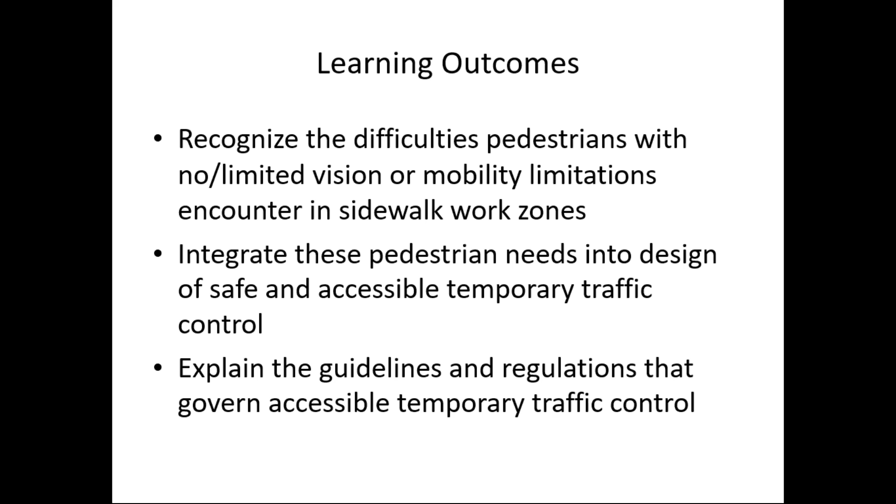I hope you'll be able to explain the guidelines and regulations that govern accessible temporary traffic control, mainly PROWAG, the Public Rights of Way Accessibility Guidelines, and the Manual on Uniform Traffic Control Devices, as well as, to a lesser extent, the Americans with Disabilities Act Accessibility Guidelines, ADAAG.

I hope also you'll be able to assess a temporary traffic control setup for safety, accessibility, and detectability. By that, I mean if you were to go out on the street and see one, maybe set up by your crews or just one that somebody else set up, you'll be able to assess that to see whether it's safe, accessible, and detectable. Or also, if you're reviewing a set of plans for a larger project, that you'll be able to assess those plans, the design of the temporary traffic control, for safety, accessibility, and detectability.

And then I also hope you'll be able to select and deploy detectable and compliant devices and temporary ramps for an accessible pathway or sidewalk closure that maybe you are setting up or your agency is setting up, and if necessary, reconfigure the pathway surfaces. So that's what I hope you'll get out of the session over the next couple of days.

We'll start with the act that really generated the need for this topic, and that is the Americans with Disabilities Act, ADA.

President H.W. Bush signed it into law in July of 1990, so it's over 30 years old now. It's an equal opportunity law for individuals with disabilities to allow them to access the same programs and services as able-bodied individuals.

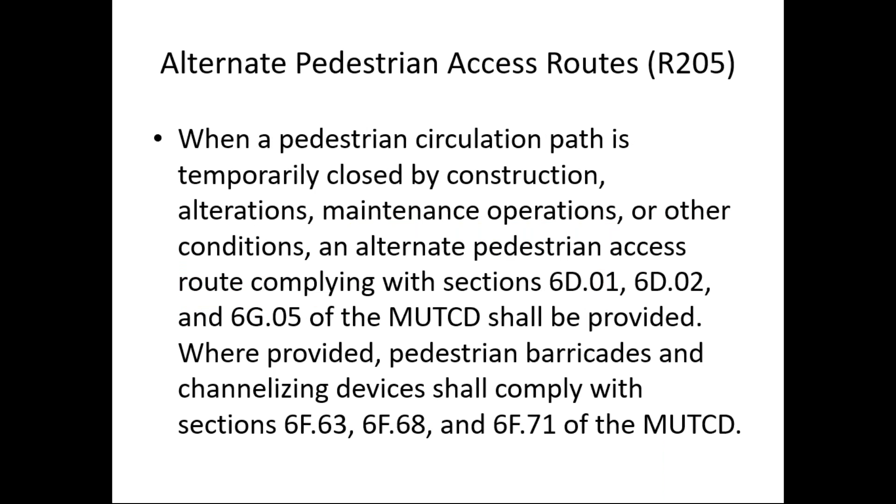PROWAG also mentions what they call the alternate pedestrian access route. There's a lot of text on this slide, I'm not going to read all of it. But the thing I'd like you to take away is notice PROWAG refers to maybe half a dozen or more sections of the Manual on Uniform Traffic Control Devices in terms of barricades, channelizing devices, and characteristics of the alternate pedestrian access route. So as I mentioned earlier, in this particular topic, both PROWAG and the MUTCD go hand in hand, and we need to be familiar with the provisions of both.

Many of you are probably already familiar with Part 6 of the MUTCD. Right up front in section 6A.01, it talks about the needs and control of all road users, which includes pedestrians, and notice they specifically call out including pedestrians with disabilities, through a temporary traffic control zone, shall be an essential part of highway construction, utility work, and maintenance operations. So it's not just a nice thing to do. The MUTCD has it as a shall condition, so it's a standard or required condition.

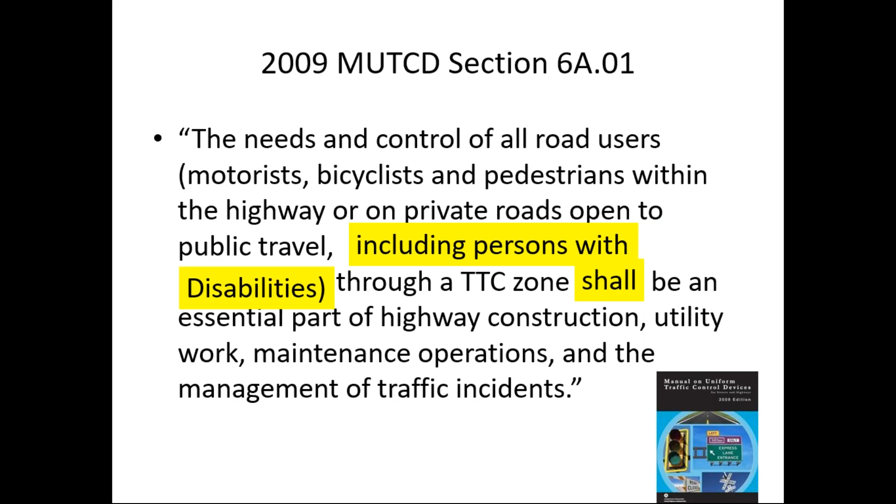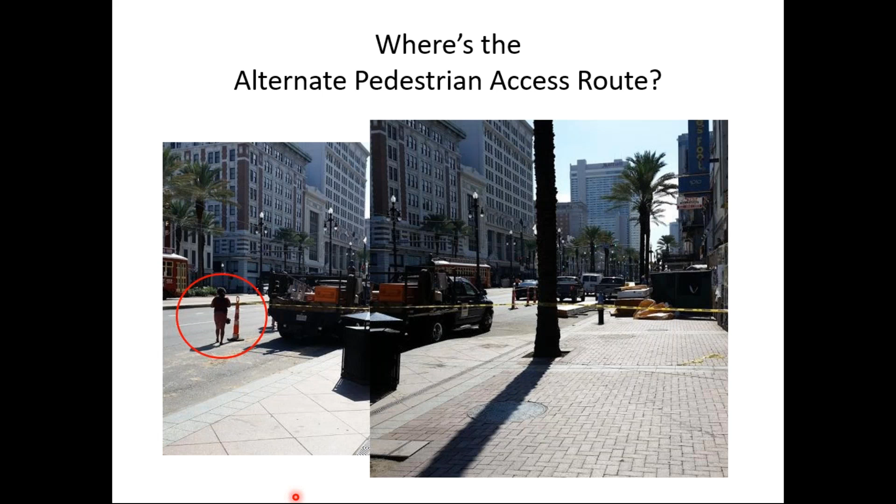So what we'll talk about over the next couple days are the requirements that apply to all temporary traffic control zones by state and local road agencies, by construction and maintenance contractors, both road construction and vertical construction, utility companies, landscape companies, anybody doing this sort of work, as well as any sidewalk, lane, or road closures for vertical construction activities.

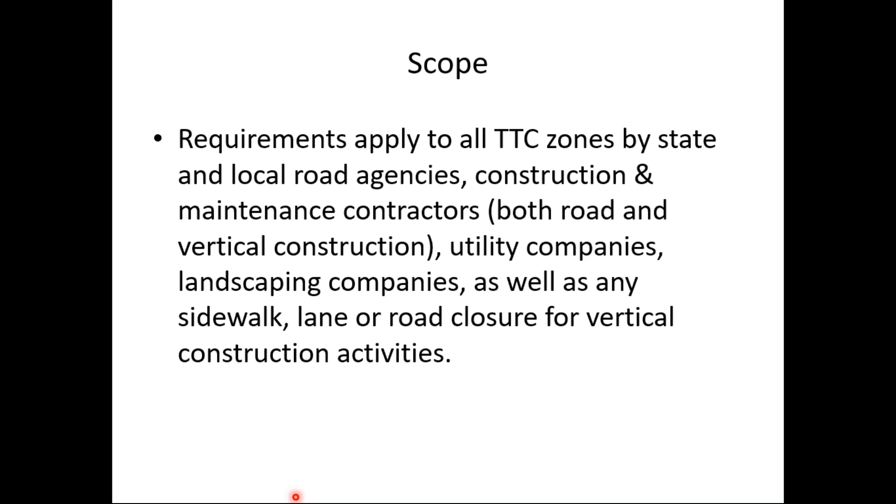That includes things we've already talked about: closing a sidewalk for repairs or utility work, closing a sidewalk for building maintenance, maybe small projects like a downtown storefront alteration or reconfiguration adjacent to the public right-of-way, where maybe all or part of the sidewalk will have to be closed for that project. And then major projects, which it appeared this project I just showed you on Canal Street in New Orleans was, where you're going to have long-term closure of sidewalks or road or street lanes.

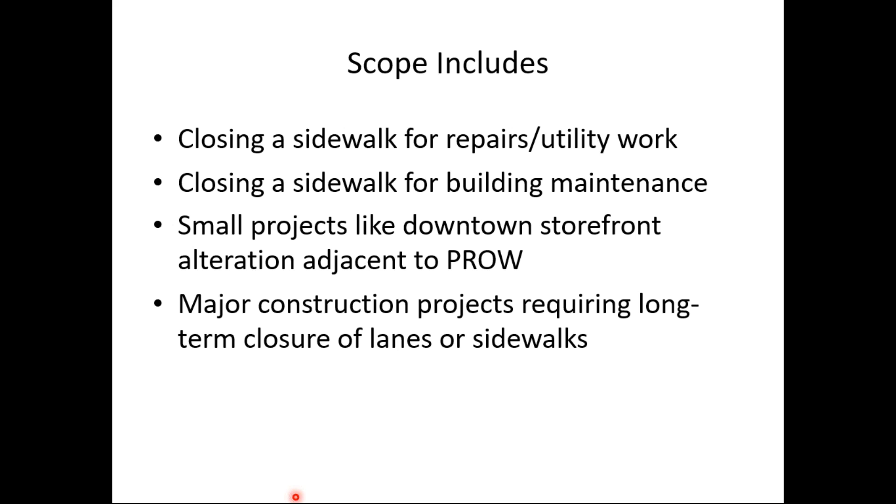Before we go on, I probably should define a couple terms. I've used the term accessible and detectable a good bit already. Accessible describes an alternate pedestrian pathway through a sidewalk work zone that pedestrians can safely reach, enter, and travel through to the end of the work zone.

That implies curb ramps, a smooth, stable, slip-resistant surface, and sufficient width that they can turn. This is not really a work zone in the image you see down here, but notice this sidewalk is a smooth, stable, slip-resistant surface. It's wide enough that at a curb ramp, for example, this individual would be able to turn his power chair, a motorized chair, into or onto the curb ramp. So this would be an example of an accessible facility.

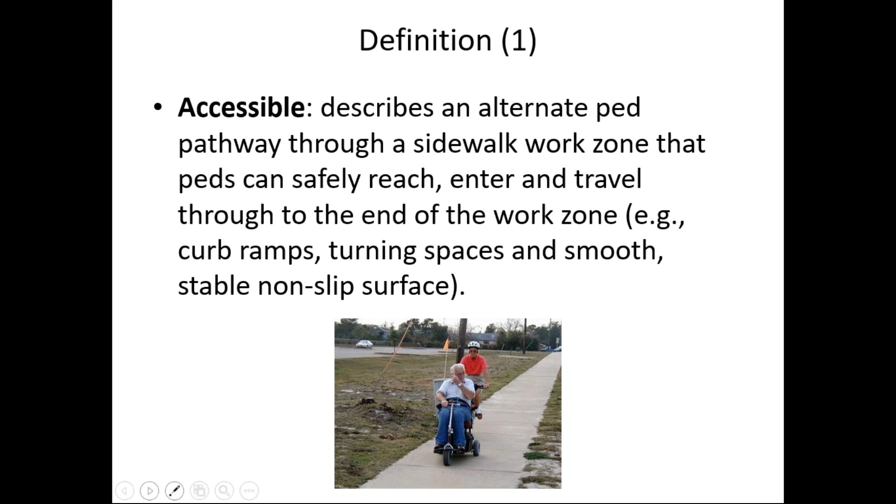I've also used the term detectable. What do I mean by detectable? Detectable means a traffic control device placed within a temporary pedestrian pathway that has a continuous edge, and pedestrians with limited vision can follow that edge either by hand or by a navigation aid, what's called the long cane or the white cane.

This is just a static photo, but the woman in this image who is blind is swinging this cane in an arc in front of her, probably about 2 to 3 feet in width, periodically touching the ground, other times maybe not touching the ground. What she and others who are blind are looking for is what they call a shoreline, some detectable edge that they can follow and maintain a reasonably straight line.

This also is not a work area, but notice this, what would we call this? A little wall here of some sort or high curb. That is detectable with the cane, and she can detect that with her cane. For her, that would be a good shoreline. She can stay pretty parallel to that detectable edge as long as it exists. So that's what we mean by detectability.

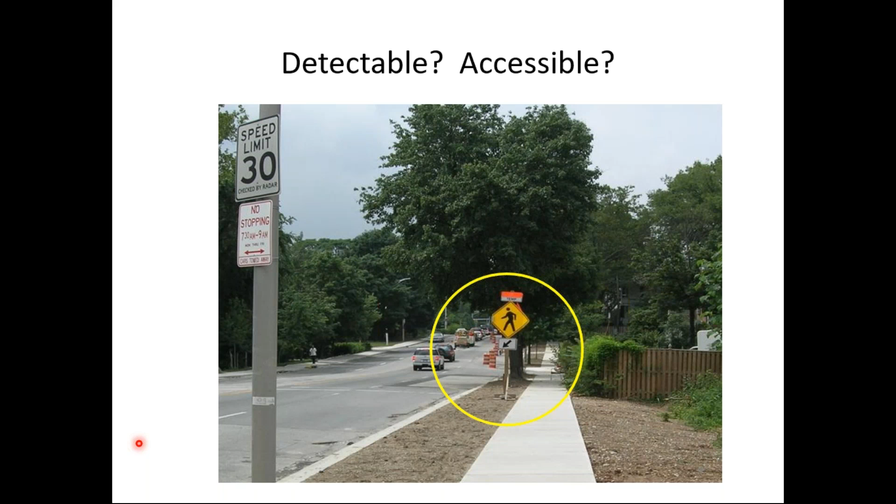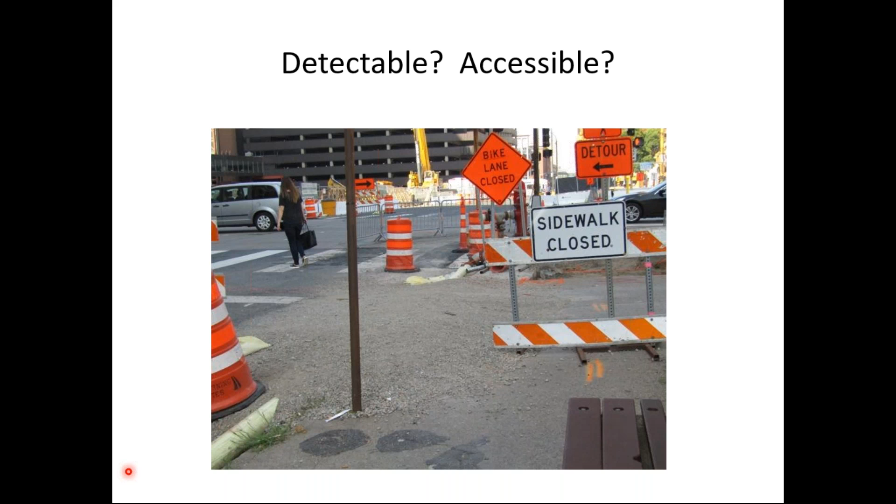Notice there's a pipe here in the gutter, and this driveway is the main access to the job site. The contractor apparently put some pea gravel here so vehicles could go over that pipe. But this loose pea gravel or stone would not be traversable by someone in a wheelchair. So this is not an accessible path for someone in a wheelchair or someone using a walker. Again, this is neither accessible nor detectable.

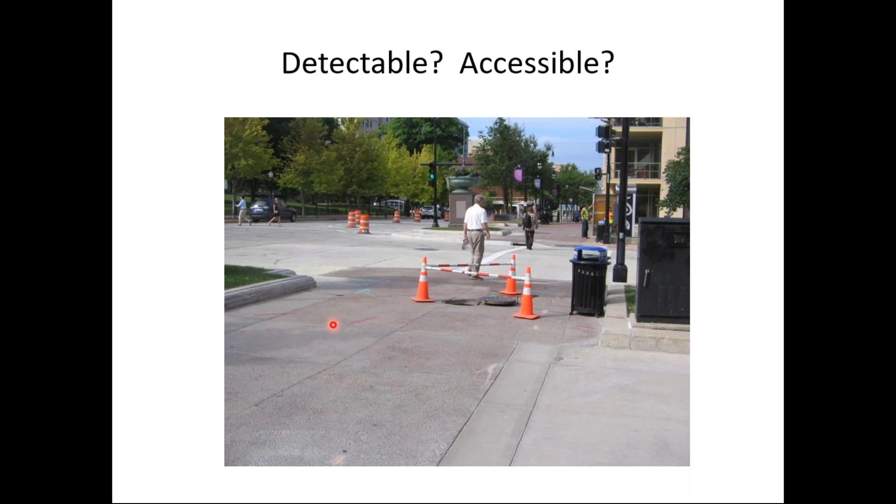For most of the time I was there, they had an individual standing here. A human can be a good form of traffic control on sidewalk work zones, because that person, if they spot a visually impaired individual, could provide assistance in terms of the proper path. And it looks like from the curb here to the cone, I'm just estimating, that's maybe 5 to 6 feet. So certainly there's an accessible path here. It's a wide enough path that someone in a wheelchair or using another walking aid would be able to negotiate the sidewalk. They may have to go around those cones, but they could still utilize the sidewalk.

Why is this important? Well, everybody benefits, even able-bodied pedestrians, from these things we're talking about. But also the United States has a significant disability population. Overall in the population, it's around 10.4%. So about 1 out of every 10 Americans has a disability. Some of us may, from time to time, have temporary disabilities. Maybe you've had a sports injury, knee surgery, or hip replacement, and maybe you were using crutches or a walker or even in a wheelchair temporarily. So it's important for the temporarily disabled that we make things accessible as well.

Many communities want to encourage visitors for economic development reasons. Where I am right now, Morgantown, West Virginia, we like to bill ourselves as kind of a retirement community—come here and live, have a good quality of life. There's a university in the city. You can take advantage of cultural activities, sporting events, and so forth. And if you're going to do that, which is a good thing, keep in mind that when it comes to the over-65 proportion of the population, I think around 33% of senior citizens are disabled, have some sort of disability. So these things are particularly important for the older population.

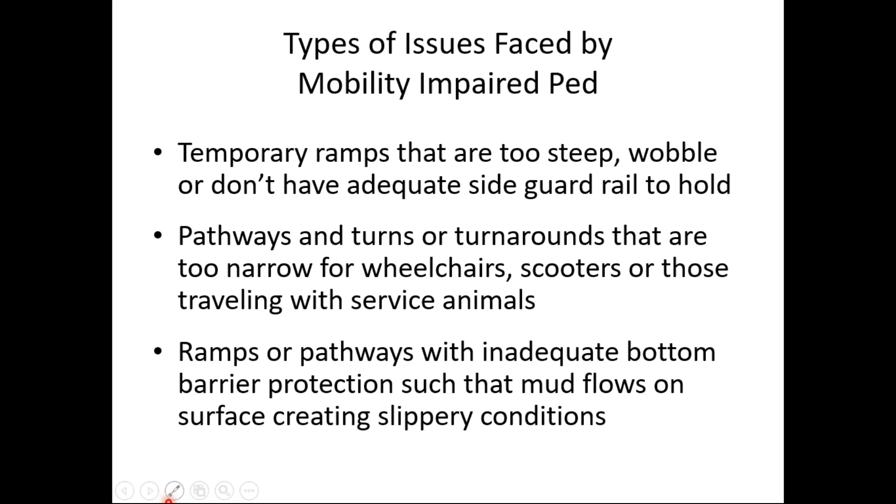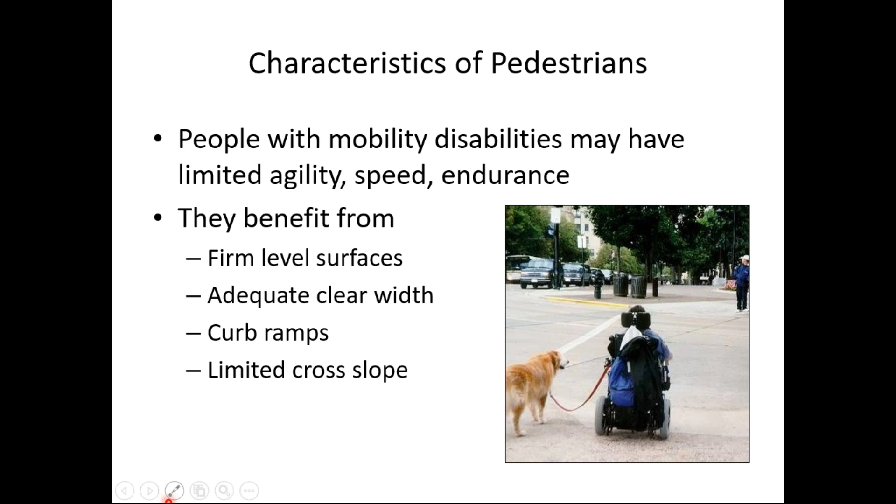Again, this is one of those things that benefits everybody. A mom or dad pushing a stroller on a city street or in a residential area benefits from these same characteristics, as does a delivery person using a wheeled cart to deliver to a store or business.

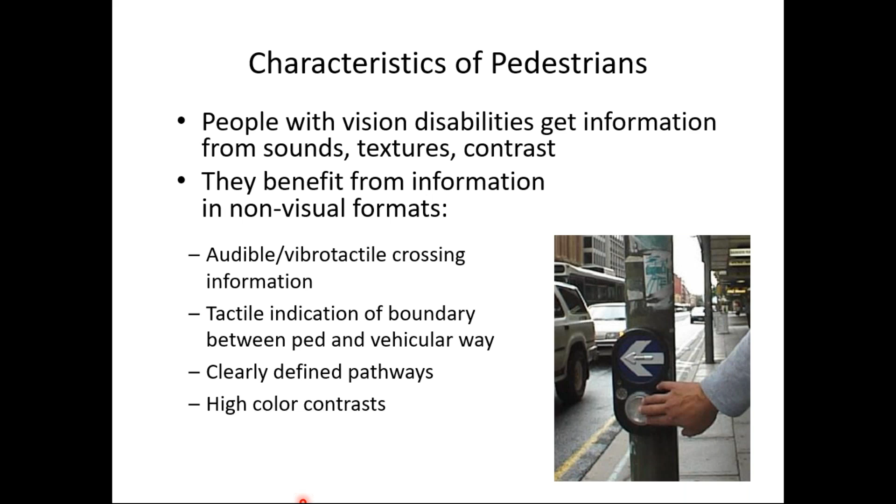The third category of pedestrians we'll talk about with disabilities are those with cognitive disabilities, meaning disabilities that affect information processing and decision making. Examples are individuals who've suffered a traumatic brain injury, maybe some of our veterans in the wars overseas, or even individuals in a serious automobile crash. Autism is another example of a cognitive disability. These are challenging to design for because there's so much variety in the types of cognitive impairments, but there are a few rules we should try to keep in mind to accommodate the cognitively impaired.

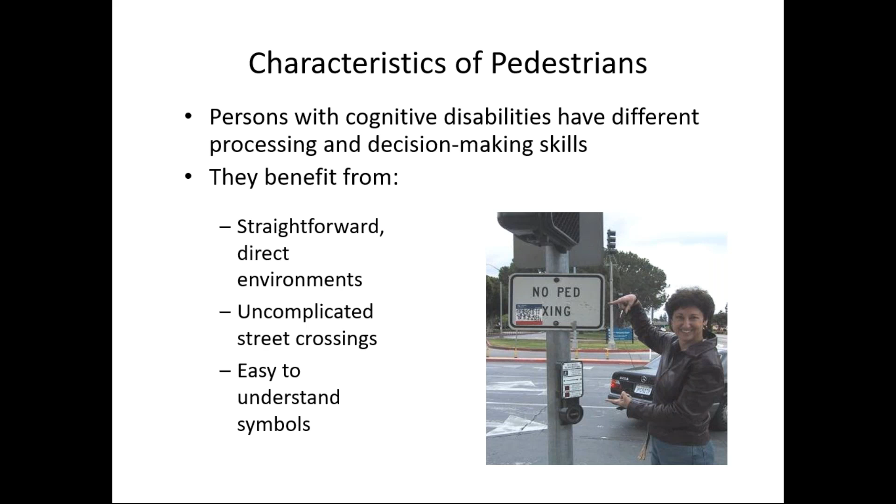Some people ask, what if they put orange and white drums in a line butting up against one another? That would be better than what's here, but I'd say still not as good as having a continuous detectable edge, like lumber or plywood that creates a detectable edge. But good question, thanks Ron.

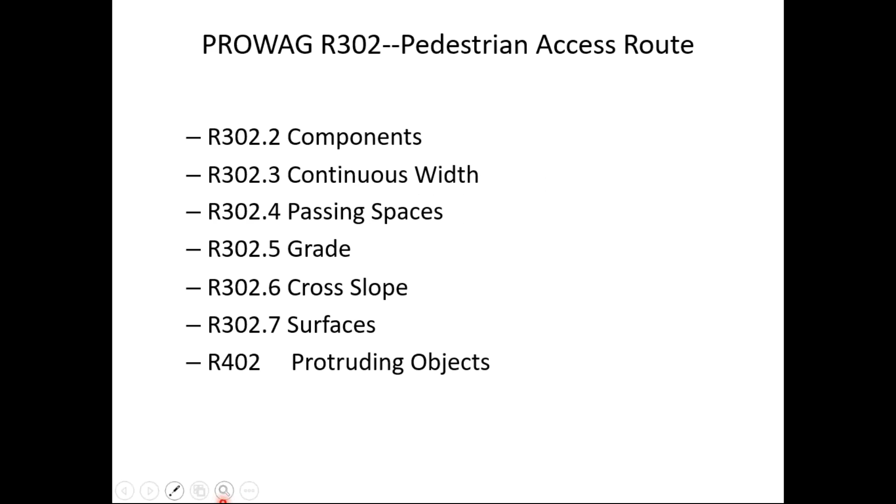Before we get into the details of some of the things you're asking about, let's look at the basics of the pedestrian access route. This comes from PROWAG. Remember, if we're required to have an accessible pedestrian route, or alternate route, we need to know what makes something accessible. So that's what we're going to spend a few minutes on. We're going to look at things like width, grade, cross slope, surfaces, and what are called protruding objects.

Where do these apply? It applies to walkways, so sidewalks, plazas you might have, ramps, which are a general kind of ramp, but also specifically curb ramps, which are a specific type of ramp, and the landings. Something called blended transitions, crosswalks. Crosswalks are part of the PAR, and also pedestrian overpasses and underpasses. Many of you probably have these in your communities. They also have to comply with the PAR requirements.

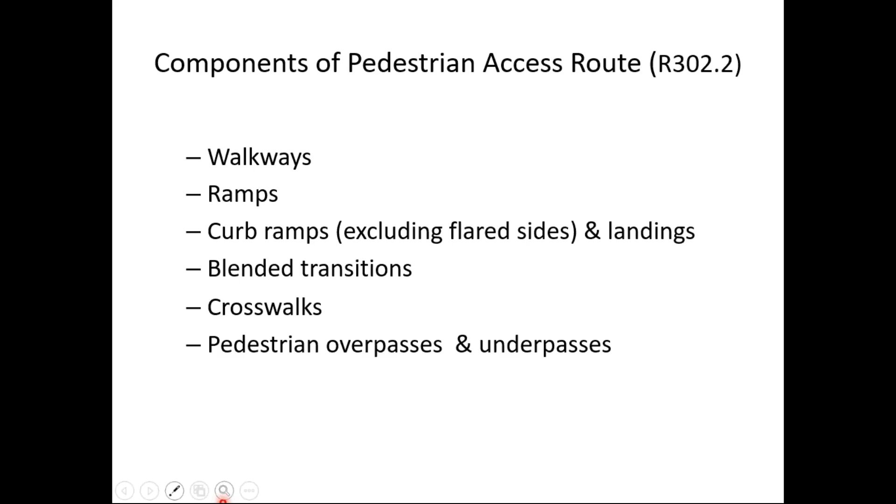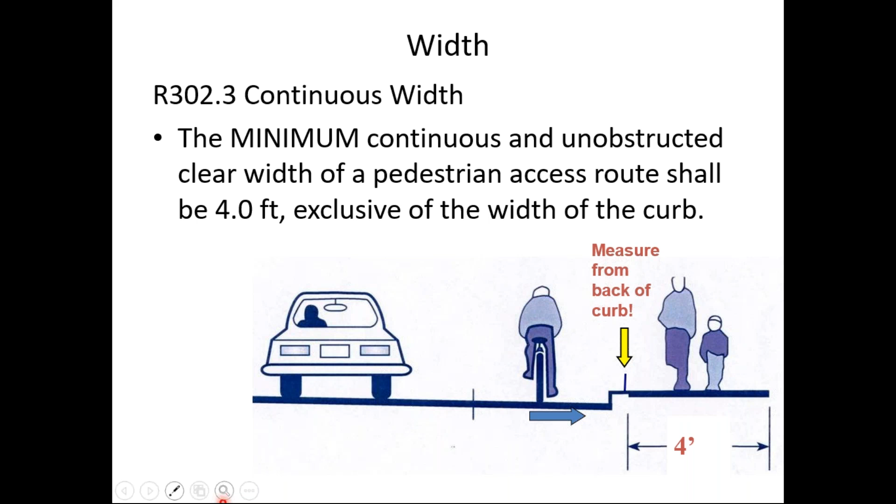Width: PROWAG says the minimum continuous unobstructed clear width of the PAR shall be 4 feet, measured from the back of the curb. That's what PROWAG says. I realize some of your agencies have adopted maybe 5 feet as the minimum width, and that's great, you've gone above and beyond PROWAG. Keep in mind, if your agency has adopted something better than PROWAG, that's your standard. But PROWAG calls for 4 feet, though I know many agencies call for 5 feet.

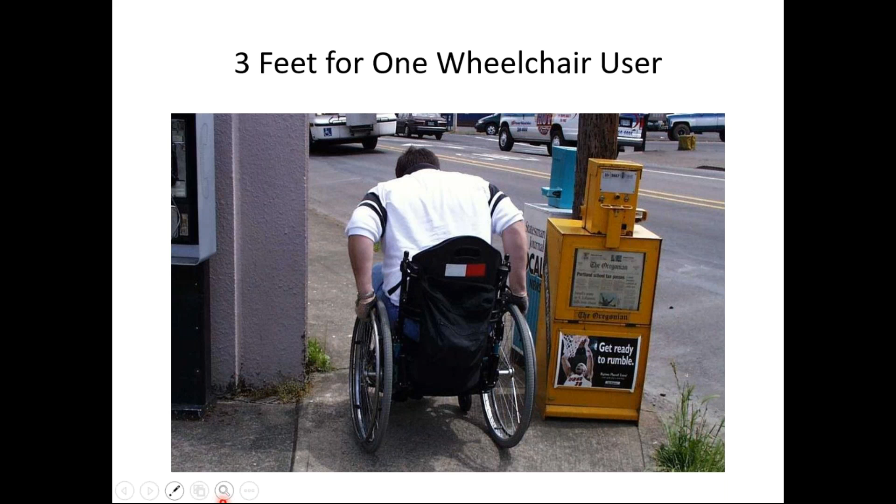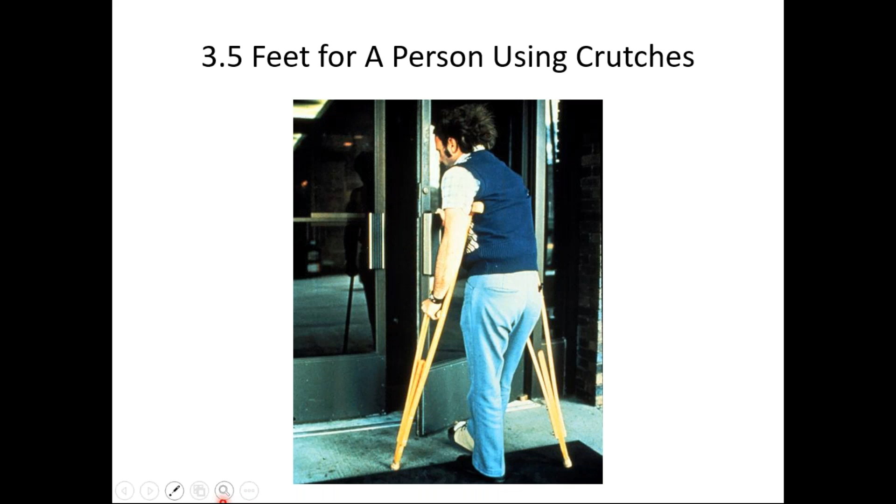Just as some examples, 3 feet for one wheelchair user. Interestingly, I mentioned ADAAG at the start. The design user in ADAAG is an individual in a wheelchair, and so in ADAAG the minimum width of a walkway or travelway is 3 feet, but it's 4 feet in PROWAG, because the design user is someone like this, on crutches or using braces or a walker. If we measured from crutch tip to crutch tip on this fellow's crutches, that would probably be closer to 3.5 or 4 feet. That's why PROWAG has a wider minimum width than ADAAG.

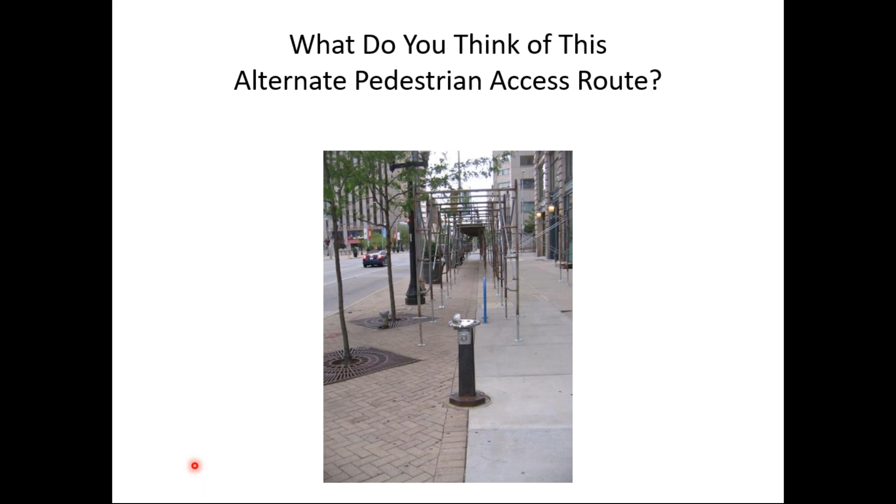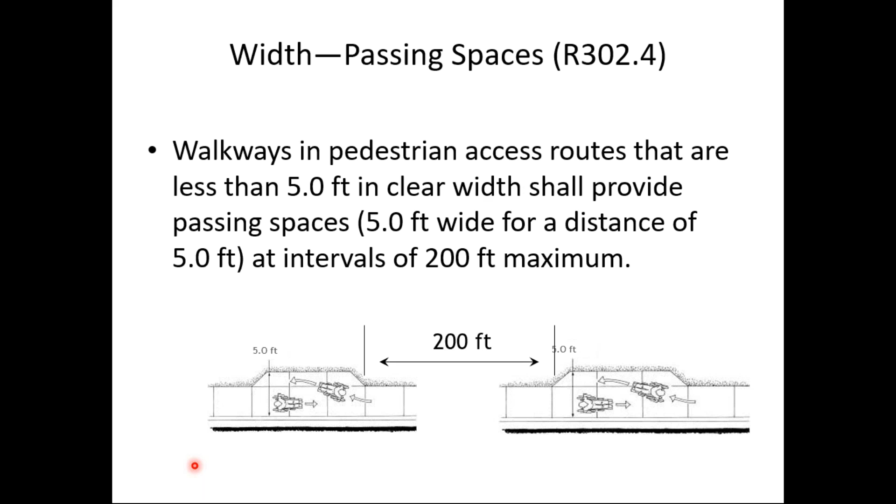If your pedestrian access route is less than 5 feet in clear width, you have to provide passing spaces, 5 foot by 5 foot passing spaces every 200 feet.

We should also be aware of what are called protruding objects. Protruding objects are things that project or protrude more than 4 inches into a pedestrian path at a height above 27 inches and less than 80 inches.

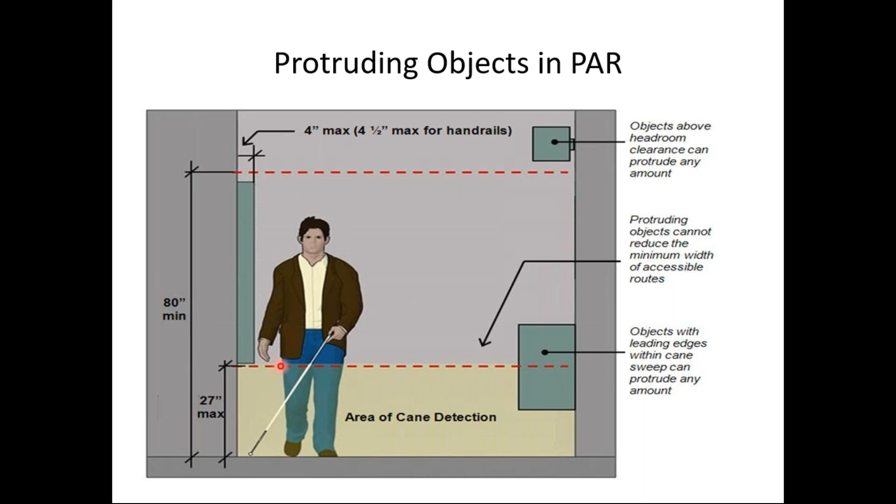Other examples are tree limbs, signs, pole-mounted traffic signal controller boxes, hanging baskets of flowers—anything that protrudes more than 4 inches into the pedestrian path at a height above 27 inches and lower than 80 inches is a protruding object because it cannot be detected with the cane. If it's lower than 27 inches, it's detectable. If it's above 27 inches, it's not detectable.

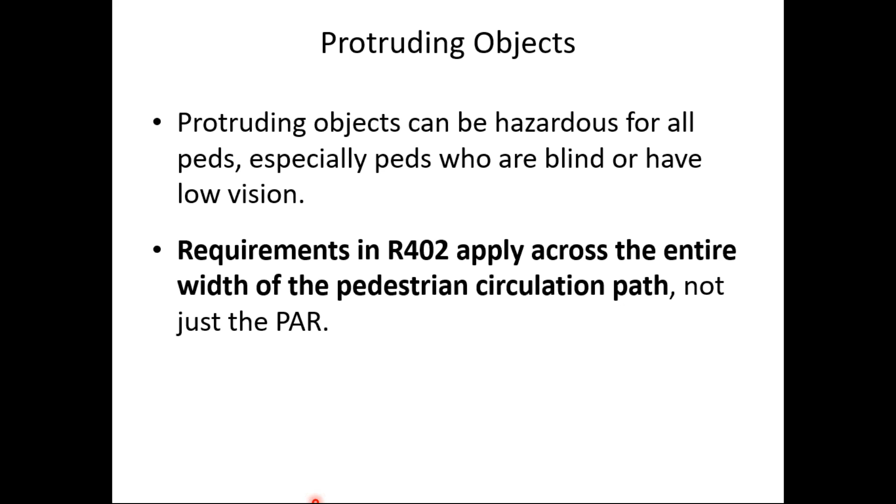These requirements apply across the entire width of the pedestrian circulation path because they're a safety issue. Somebody could poke their eye out on a tree limb or be injured by striking the fire department connection or one of these other protruding objects.

Walkway cross slope, maybe one of the biggest challenges within PROWAG. The cross slope of the walkway, the pedestrian access route, shall be 2% maximum. I underline maximum because there is no allowance for construction tolerance. So if your concrete crews or your contractor says the best I can do is plus or minus 0.5%, then we need to be designing the walkway for 1.5% so that when it's built, it won't be more than 2%.

The reason for this strict requirement is the individuals in the manual wheelchair. It takes a lot more effort to keep a straight line on a steeply cross-sloped surface than on a more level surface.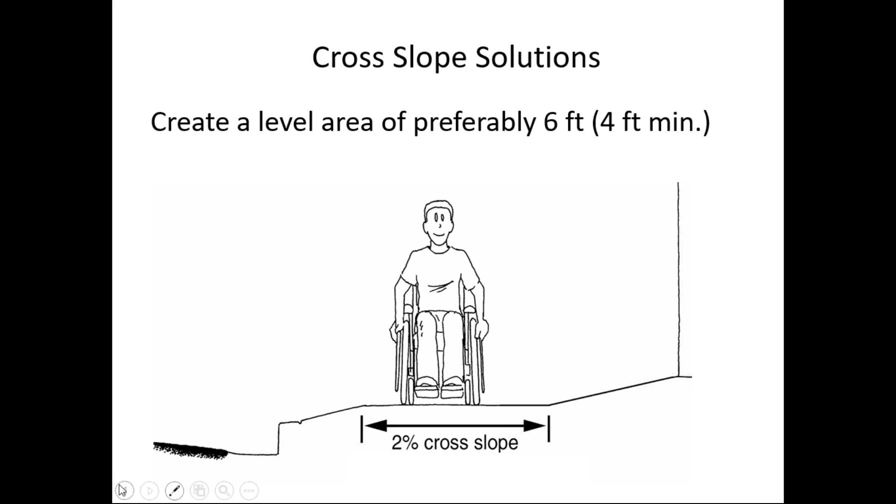Grade: if the sidewalk is in the right of way and along the road, follows the road, then the sidewalk grade can follow the roadway grade, no matter how steep it is. But if the sidewalk does not follow the street, then the maximum sidewalk grade is 5%.

Something else to keep in mind, as we see in the cartoon drawing here: imagine this individual's crossing the street. They went down the curb ramp and now they're going up the street crown to cross the street. The maximum crosswalk grade is 5%, so that means the maximum street crown is 5%. Remember, crosswalks are part of the pedestrian access route, so they have to comply with these requirements.

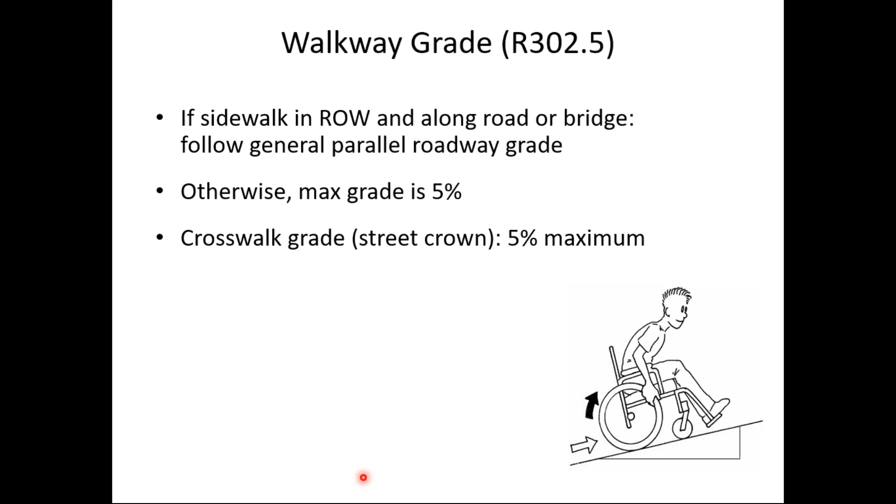In terms of a manual wheelchair, it obviously takes a lot more energy to go uphill, more tiring than downhill, but actually, to me, downhill is probably the more critical situation. It's difficult to control the speed of the wheelchair—that's why this fellow is wearing gloves in the summertime, to avoid blistering or peeling the skin off his hands trying to brake the wheelchair. People using crutches, walkers, or canes also find it harder to go downhill because it may be difficult to maintain stability, balance, and control, and there's a greater danger of falling.

A real cross slope challenge is driveways. The grade of the driveway becomes the cross slope of the sidewalk, and it's like a West Virginia driveway—most of our driveways are far steeper than 2%. So then it becomes a non-compliant sidewalk cross slope.

Another issue is the grade breaks here, where the sidewalk meets the driveway. I realize this is a cartoon depiction, but it's technically accurate. If you look closely, notice the small front wheel of that wheelchair is off the ground. Any time that happens, that's not good, because the stability of that wheelchair is jeopardized—that chair could tip over or flip over. So we want our designs to be such that all 4 wheels of a manual wheelchair are always on the ground at all times.

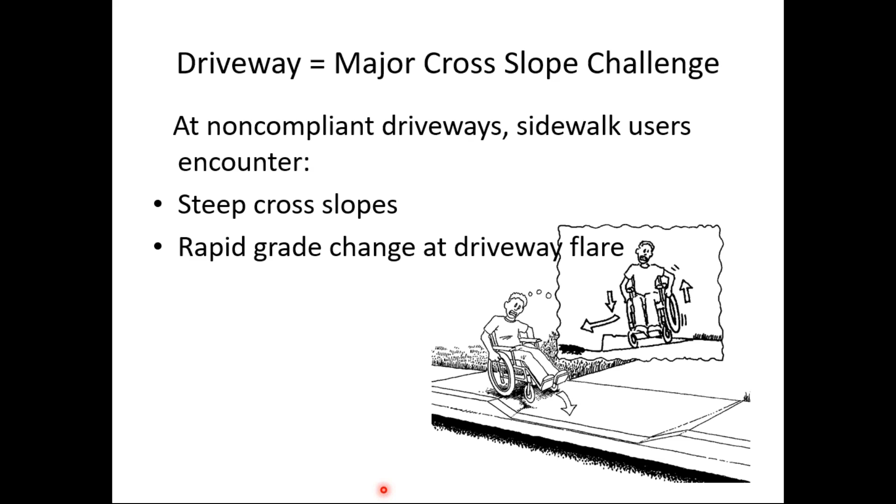Surfaces, per PROWAG, must be firm, stable, and slip resistant, and should be smooth. The best surfaces would be concrete or asphalt, or timber like a boardwalk. That's firm and stable, but may not be slip resistant when wet, so we may need to increase the friction. Same thing with steel plates. Sometimes agencies put a steel plate over a trench in the sidewalk, which is fine as long as there's a way to get onto and off that plate, but there should also be some slip resistance on it, because metal can get slippery when wet.

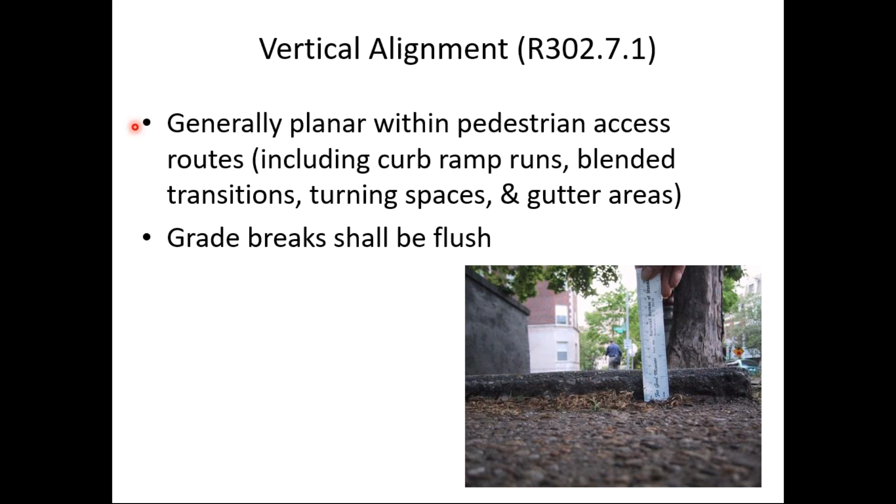We do need to pay attention to vertical alignment. This is not a good situation. It shows kind of a double jeopardy here. An agency could face an ADA civil rights lawsuit because this would not be traversable by a wheelchair. But also, if an able-bodied pedestrian tripped and fell here, the agency might be subject to a personal injury lawsuit as well. Notice how this stops the manual wheelchair, and depending on the speed of the chair, that abrupt stop could actually pitch the person out of the chair onto the sidewalk.

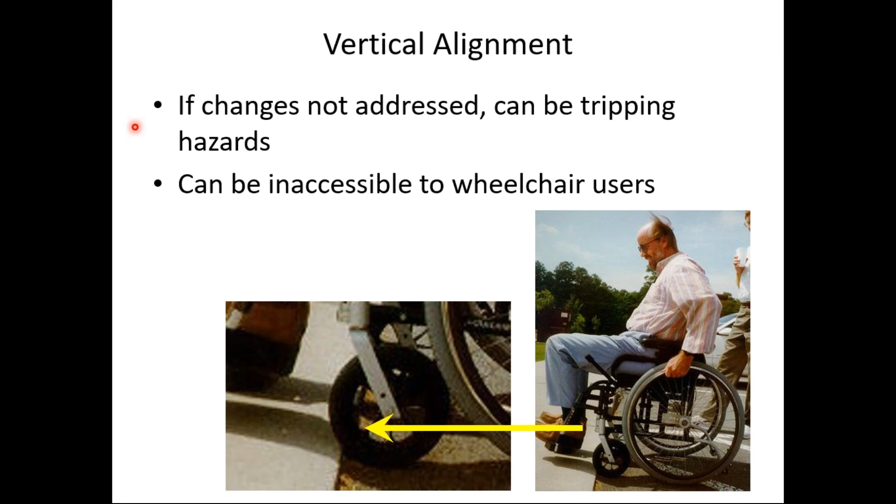PROWAG does have guidance for vertical surface discontinuities. They cannot exceed a quarter inch maximum, and those between a quarter and a half inch need to be beveled with a slope not steeper than 50%, or 2 to 1. So we could put in a wedge of concrete - that would be one way to get that ramping or beveling. Or if it's a concrete sidewalk, we could grind the upper slab at that 2 to 1 or 50% slope across the entire vertical surface discontinuity.

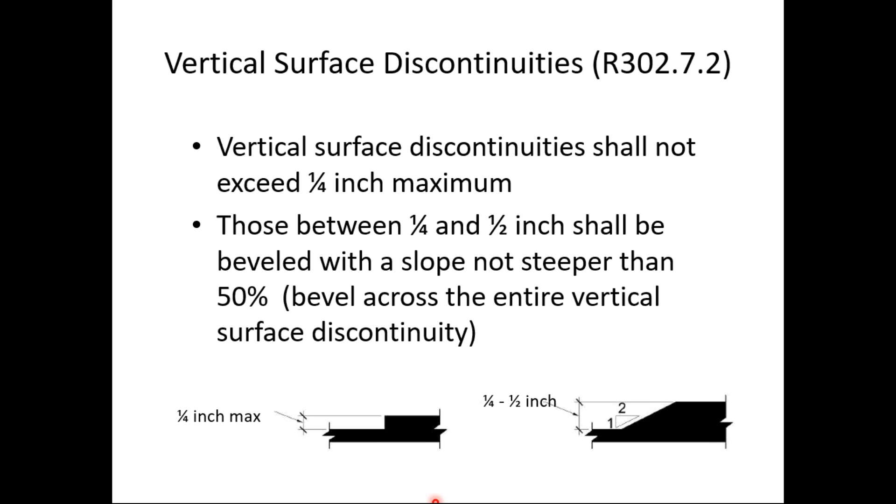Here's another example. This is not the same site in both images, but shows kind of the same problem. Notice on the left, I guess maybe they're pumping concrete or something, and notice this hose across the sidewalk. Obviously, that's sort of a safety hazard as well as an accessibility issue. Someone can't get through there unless they're able to step or jump over that hose. On the right, you see a potential solution to that issue of the large hose across the walkway. What do you think?

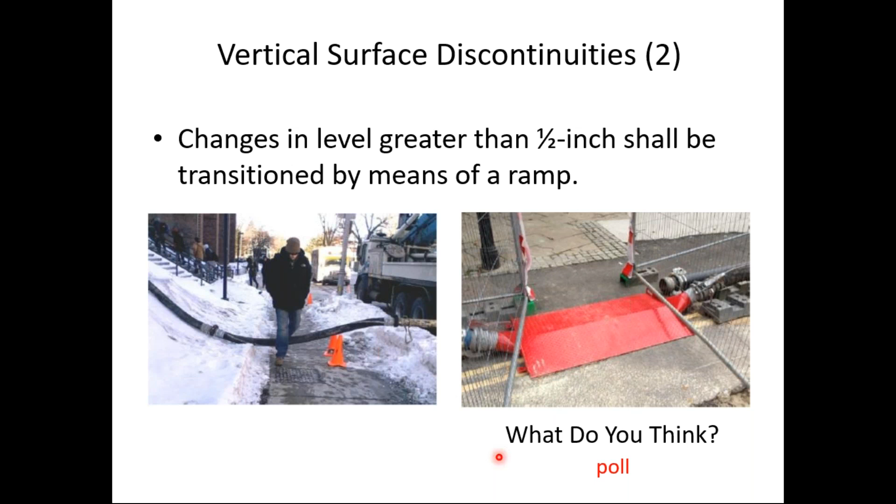Obviously, this looks steeper to me than 50% or 2 to 1. And if we look closely, it looks like this is just sort of enamel paint on this ramp arrangement, some sort of metal ramp. Actually, this would probably be slick even in dry weather, but especially when it gets wet it will become very slick. So the correct answer is C - the ramp is too steep and the surface is too slick.

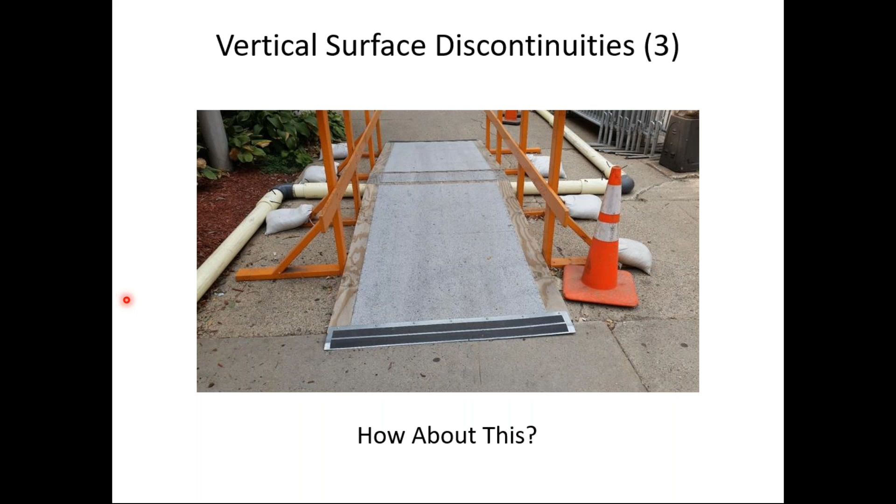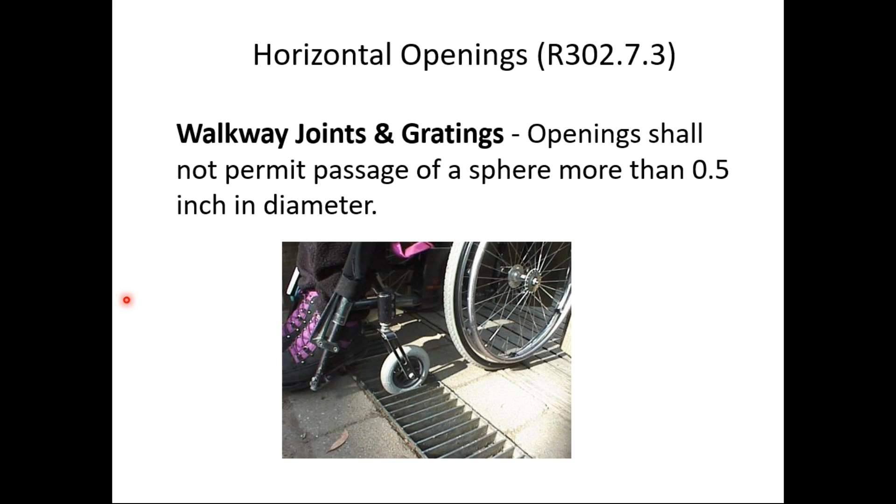Also need to be alert to joints in the walkway and gratings, because the small front wheels of the wheelchair can drop into that, causing immediate stopping of the chair, or somebody's crutch tip or cane tip could drop into an opening. So not only the width of the openings, but also the orientation of the openings is important.

Curb ramps, I mentioned curb ramps. We'll go through this kind of quickly, but curb ramps address what I call the curb ramp conundrum. Curbs are a good thing for the visually impaired. They create a shoreline, so a blind pedestrian with a cane can follow the curb. However, if I'm in a wheelchair, those curbs are not a good thing because they're a barrier. They prevent me from moving between the sidewalk and the street. So we put in curb ramps to remove that barrier, but then for the width of the ramp, there is no curb, and so it'd be possible that a blind pedestrian could walk out into the street without knowing it.

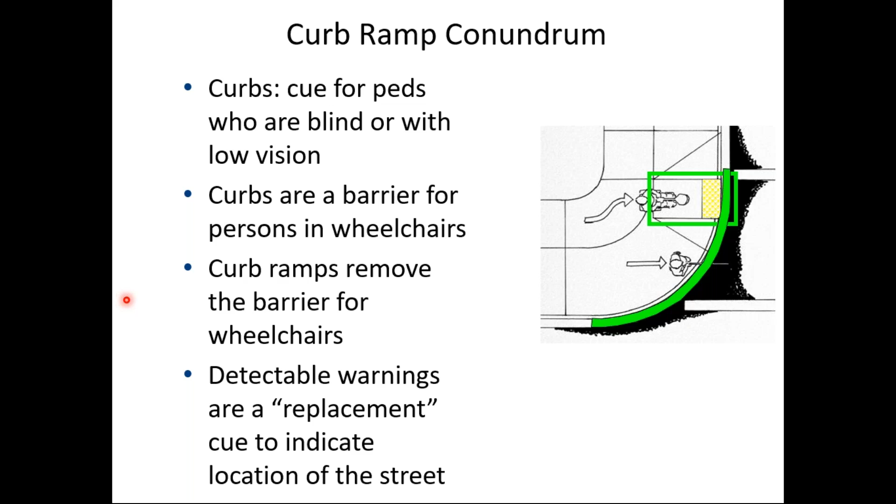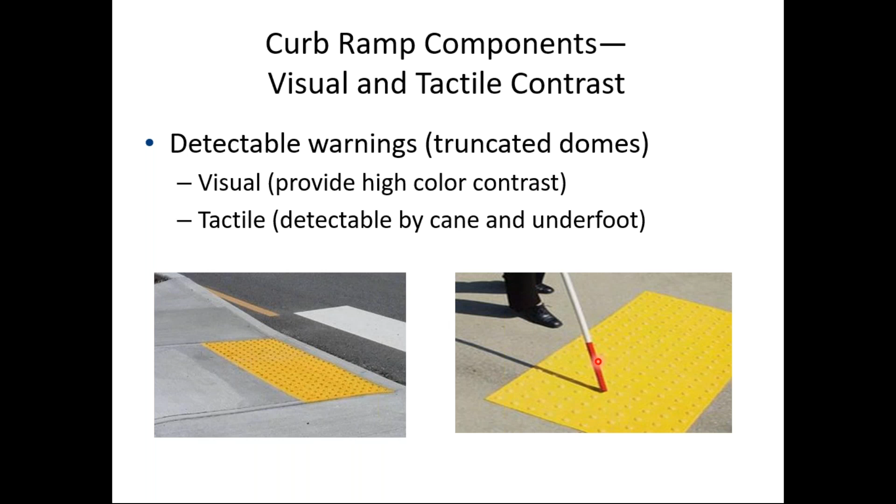I mentioned the detectable warnings. They provide a visual, meaning a high color contrast cue to low vision pedestrians, and they provide a tactile cue to the blind pedestrian using the cane. This truncated dome surface is designed to be detected with the cane. But low vision pedestrians, the ones who rely on color contrast, usually don't use a cane. So this surface is also designed to be detectable underfoot, so if someone steps on it, they're aware that they're on that surface.

The rule is: use the detectable warning everywhere the curb is missing at a street crossing. These are used as a warning device. They let the visually impaired know that they are about to enter or cross a street. They do not have any directionality or wayfinding function associated with them. They're strictly a warning device.

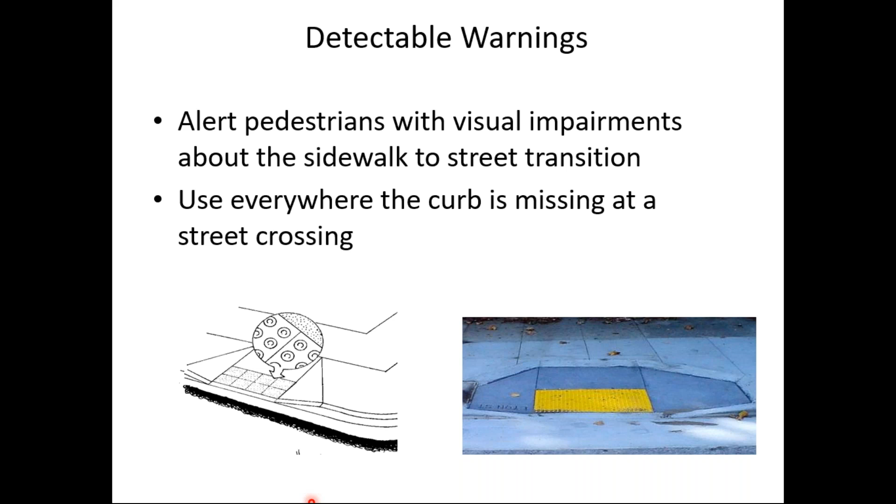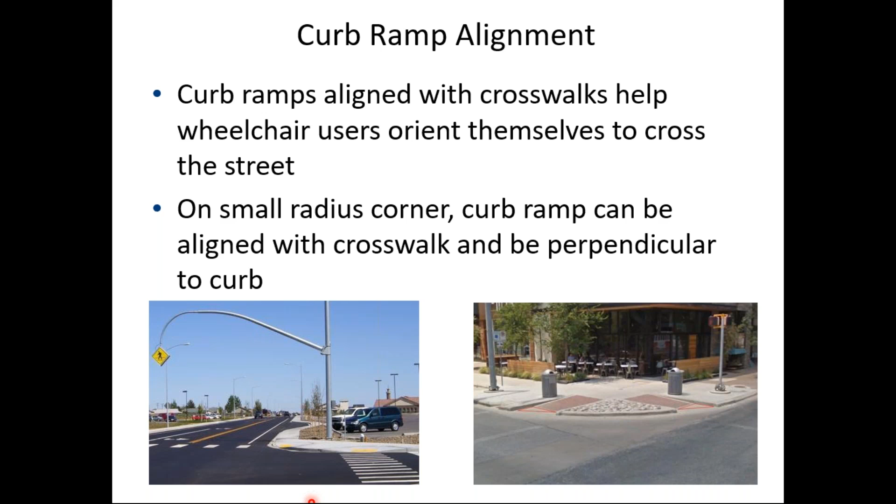Curb ramps should be aligned with the crosswalk to help wheelchair users orient themselves. On small radius corners, that's fairly easy to do, as you see here. Not so easy on large radius corners.

Curb ramp grade, the maximum grade is 8.3%. But again, there's no allowance for construction tolerance, so some agencies design them for 7.1 or 7.5% so that when they're actually built, they won't be steeper than 8.3%, or 1 in 12 slope. And when you're chasing grade, the running slope length need not exceed 15 feet, but the slope has to be uniform.

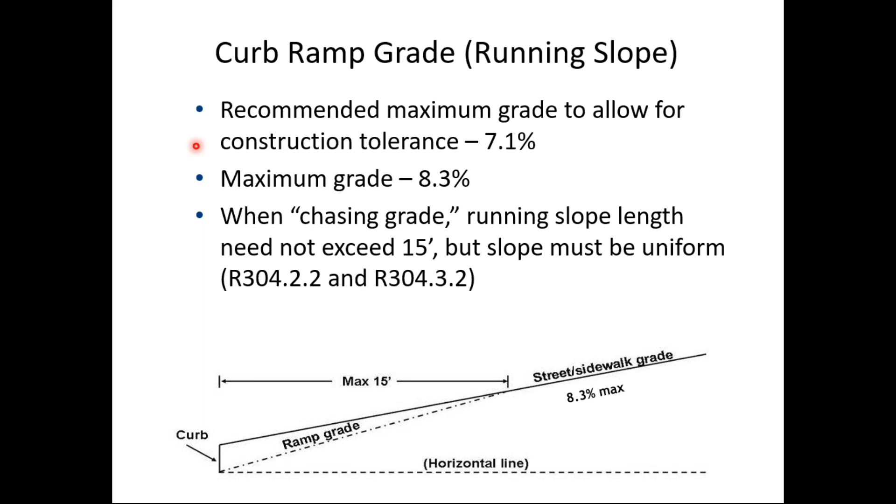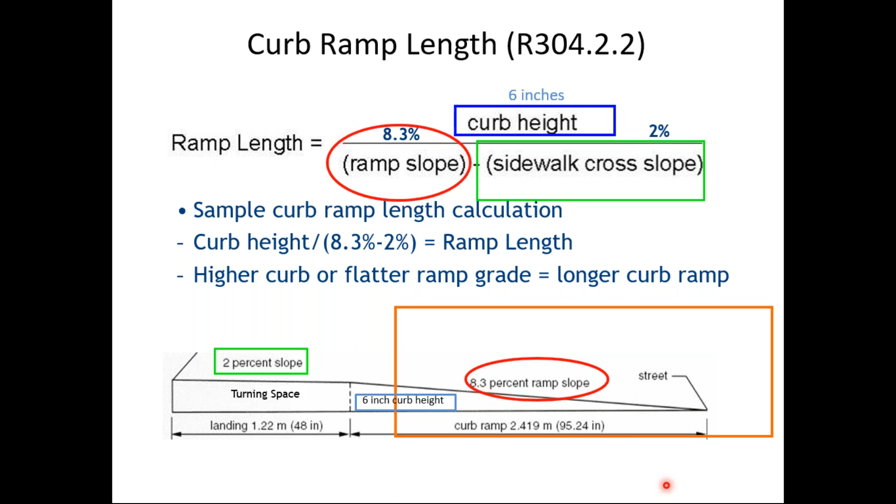Here is the formula for calculating the curb ramp length, and a little example here for a 6-inch high curb, 8.3% ramp slope, 2% sidewalk cross slope. If you plug into that formula, you come up with 95.24 inches, almost 96 inches, almost 8 feet for your curb ramp. And then if you also have to have a 4 or 5 foot level turning space at the top, from the back of the sidewalk here to the curb, we could be talking 12 or 13 feet. So these curb ramps do take up a considerable length in terms of the sidewalk.

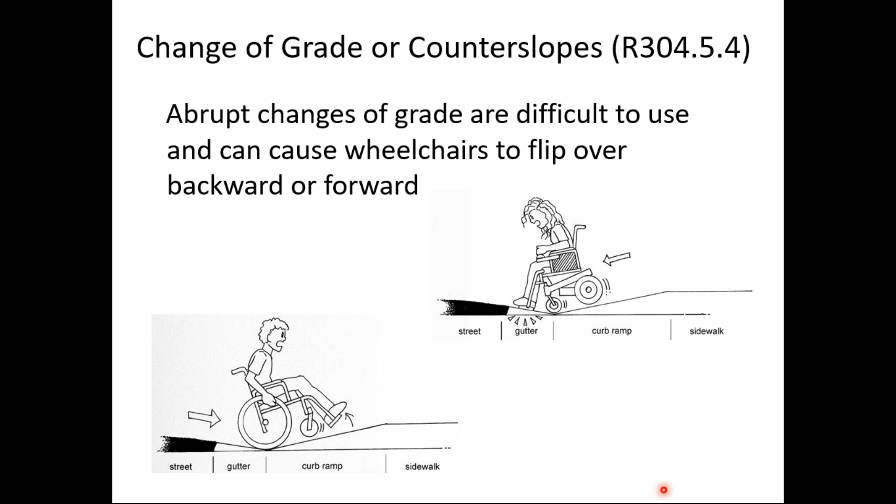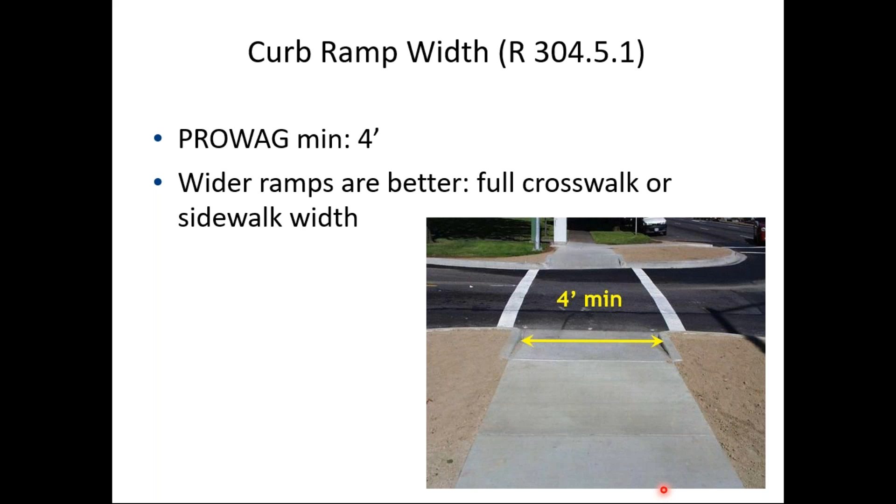Curb ramp width, PROWAG minimum, is 4 feet, but the wider the better. My recommendation is to make the curb ramps the full width of the crosswalk or the sidewalk.

Turning space: there needs to be a level turning space at the top of each ramp, and that is 4 by 4 if it's an unconstrained condition. Notice this turning space serves both ramps, but this is unconstrained, meaning the footrests of the wheelchair could go out over the grass or over the sidewalk as the person is turning.

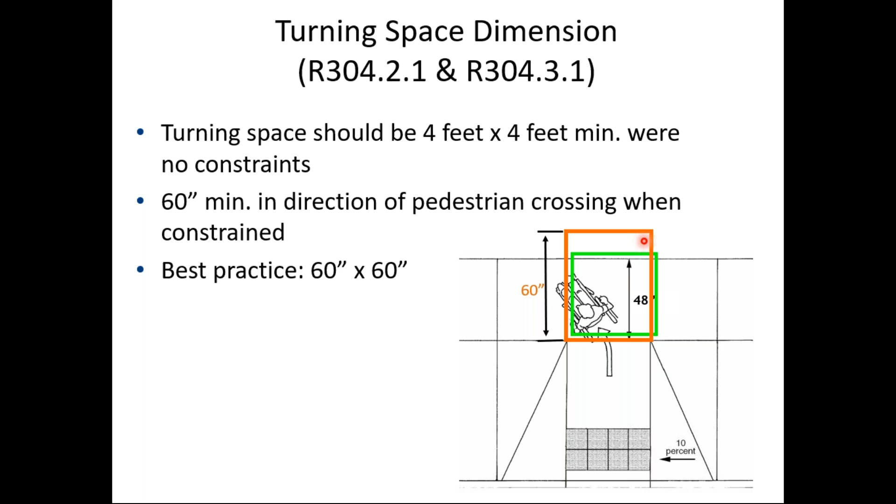So for an unconstrained condition, it's 4 feet by 4 feet. For a constrained condition, the turning space needs to be 5 feet in the direction of travel. If this is just grass next to the sidewalk, we can use a 4-foot turning space. But if there's a building or a curb that constrains the footrest from going beyond that point, then we need 5 feet in the direction of travel.

And I mentioned the flared sides. When the ramp is in a pedestrian circulation path, the flares have a slope of 10% maximum, measured parallel to the curb.

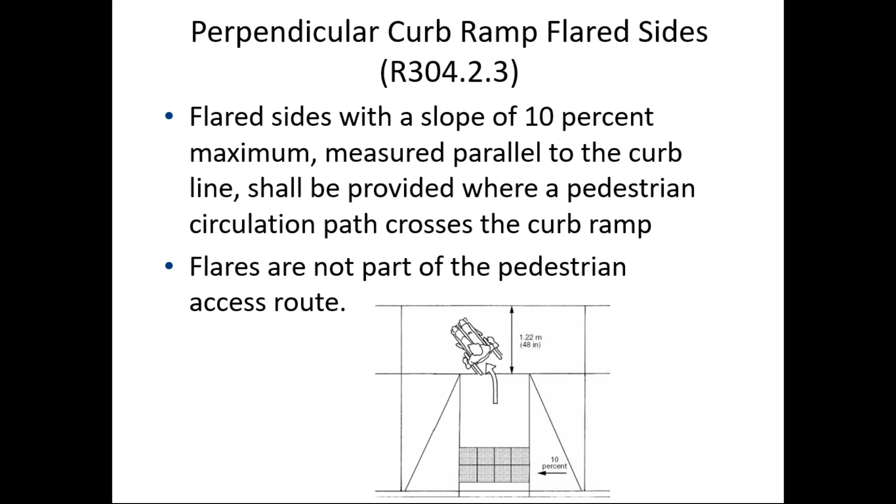What about if the ramp is not in a pedestrian circulation path? Notice here, this ramp is in the buffer zone or tree lawn, grass strip—whatever we want to call that—and so this is not a pedestrian circulation path. In that case, we can use the vertical curb return sides on the ramp.

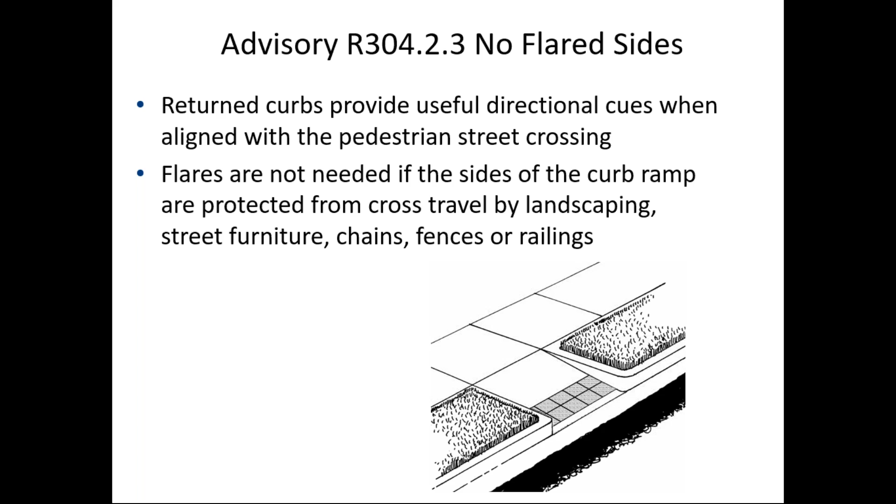Ramp surfaces should be smooth. Texture makes them hard to climb. It's too bad we're not meeting in person—we could go out on the streets and you could actually go up a curb ramp, or go up two of them, one smooth and one textured, to verify this yourself.

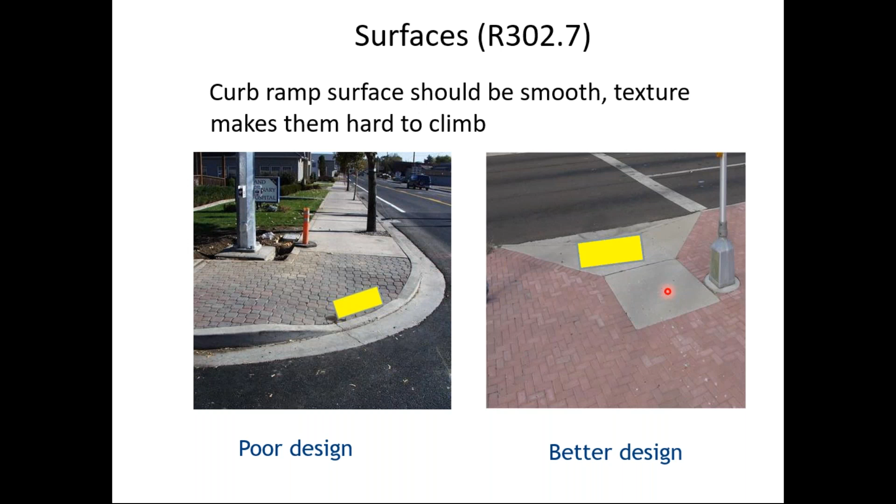This may look nice here with the paver blocks, although I don't think they have a big enough turning space at the top. This is really hard to go up in a manual chair. A better design is to make the ramp and the turning space smooth—easier for turning, easier for going up the ramp.

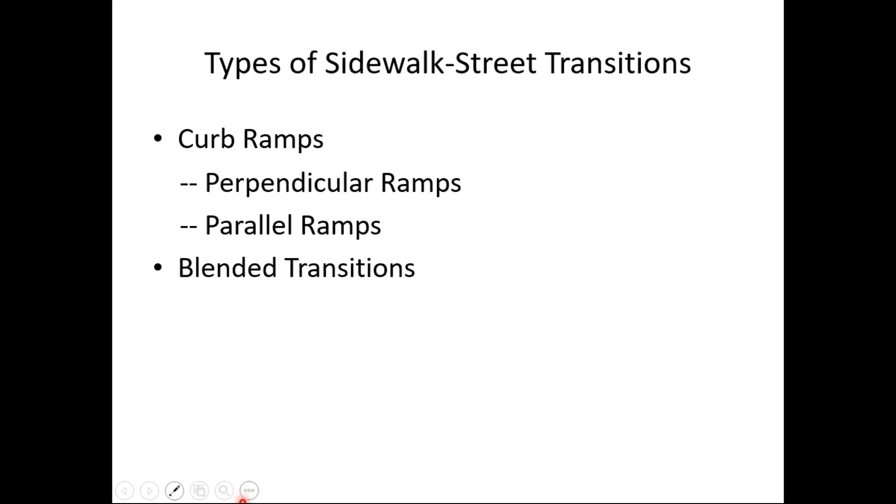There are 3 types of sidewalk to street transitions: there's 2 types of curb ramps and something called the blended transition. The first type of curb ramp is the perpendicular ramp. Notice there's 2 ramps per corner.

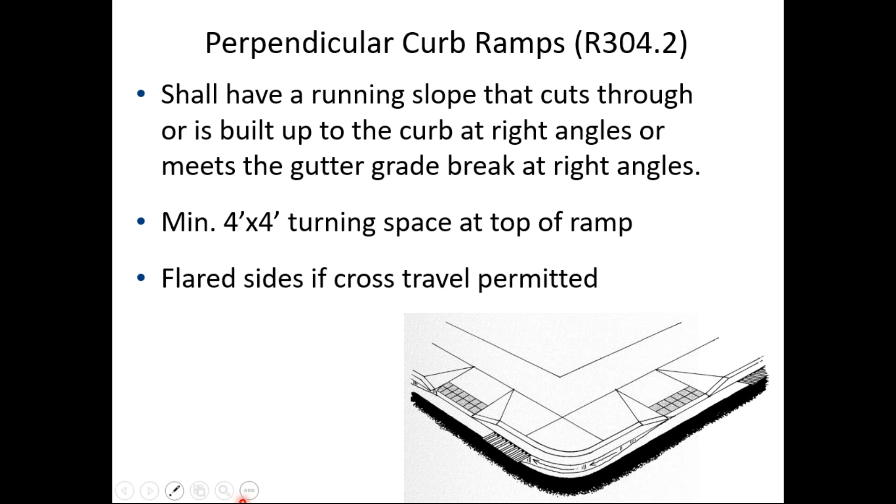In this case, the ramps are in a sidewalk, so they have flares. There's a turning space at the top. I think I showed you this image earlier—again, here's 2 perpendicular ramps at a corner. They both share the same turning space, and that's allowed.

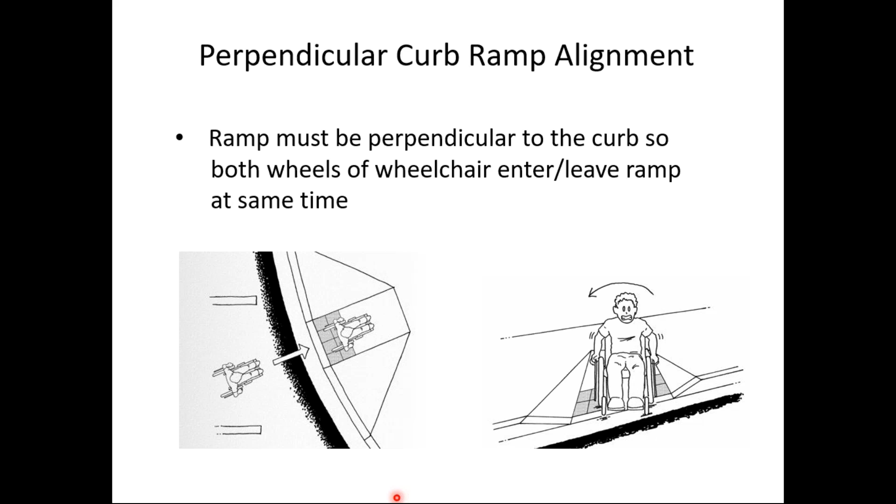The ramp has to be perpendicular to the curb so that both wheels of the wheelchair enter and leave the ramp at the same time, like you see on the left. The image on the right, I still see that from time to time, and it's not good—that's what I'd call a skewed ramp. Notice one of the wheels of that manual chair is off the ground, so this chair is in danger of tipping over because both wheels are not entering the street at the same time.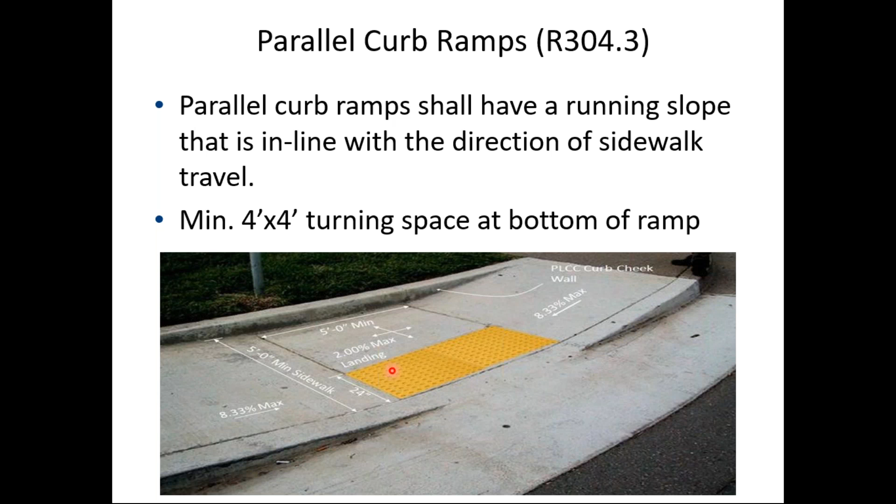That's a constrained condition—the footrest will just bump up against that. So in this case, this needs to be 5 feet in the direction of travel. From the back of the curb to this curb in the back is 5 feet. And notice in this case, the detectable warning is part of the turning space.

Notice I have not mentioned the single or diagonal curb ramp, where we just have one ramp on the corner. That's because, under PROWAG, these are unacceptable in new construction, so we shouldn't be building any more new single or diagonal ramps. They may be okay for alterations if it's technically infeasible to use one of the other types of sidewalk to street transitions. One of the reasons is, notice this individual in the wheelchair, to get into the ramp he or she has to leave the protection of the crosswalk, and actually has their back to traffic just to enter the ramp.

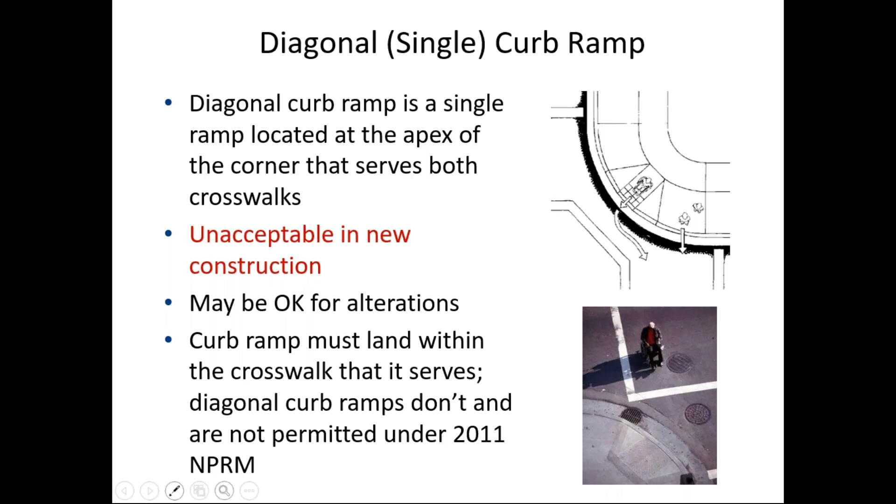Placement of detectable warnings: they should be at the back of curb, and there should be 24 inches of truncated dome material. They do need to contrast visually with the background. Yellow on concrete is fine. In the upper right, you see gray on concrete is not good - I can't even really see the detectable warning here. Probably on concrete, black would have the best contrast.

But something we've learned from experience is that guide dogs that assist the visually impaired, the blind, and people with certain low vision conditions perceive that black as a hole in the sidewalk, and the dog will actually lead its handler around that hole. So now it's recommended that we use any color that provides good visual contrast, but not black. In fact, I think probably the final version of PROWAG will say that we shouldn't be using black for the detectable warning surfaces.

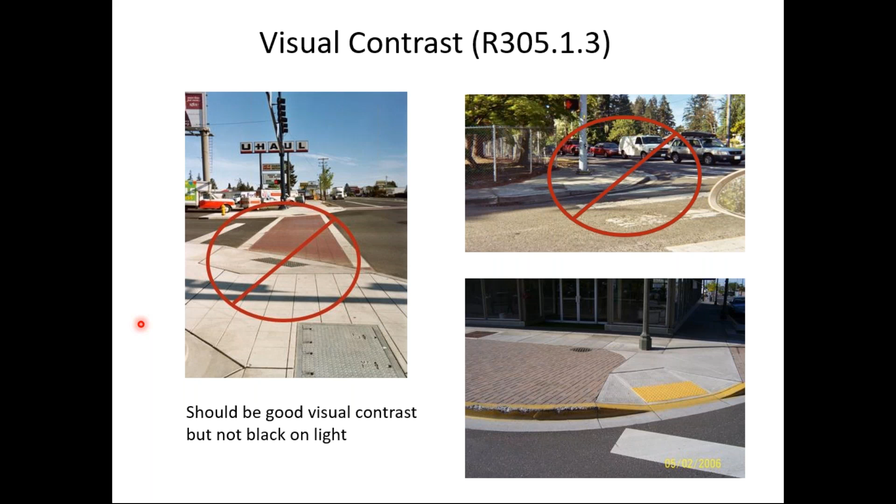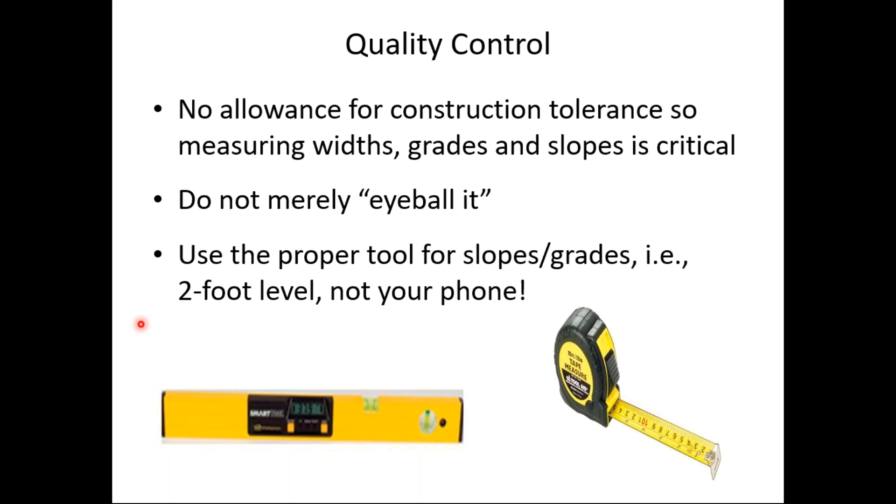Quality control is important. You should be measuring the forms, measuring the finished work. Don't just eyeball it. Make sure you or your crews have the proper tools, digital levels, tape measures to make sure things can be measured properly.

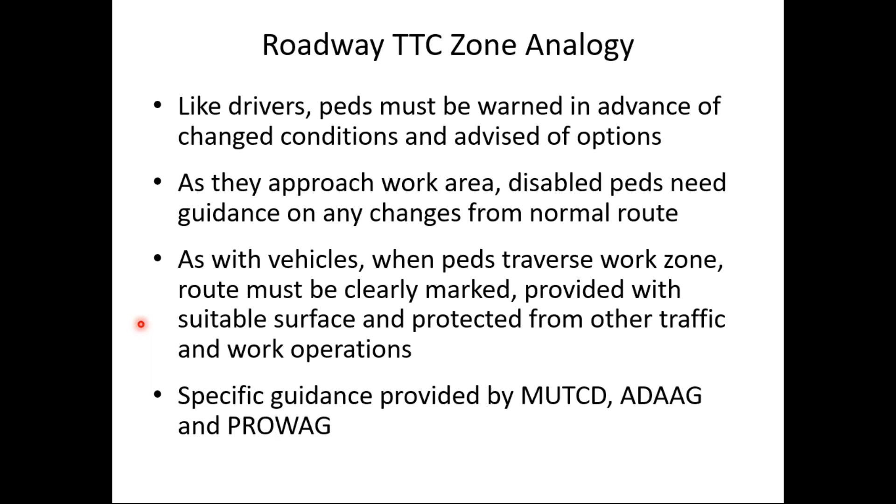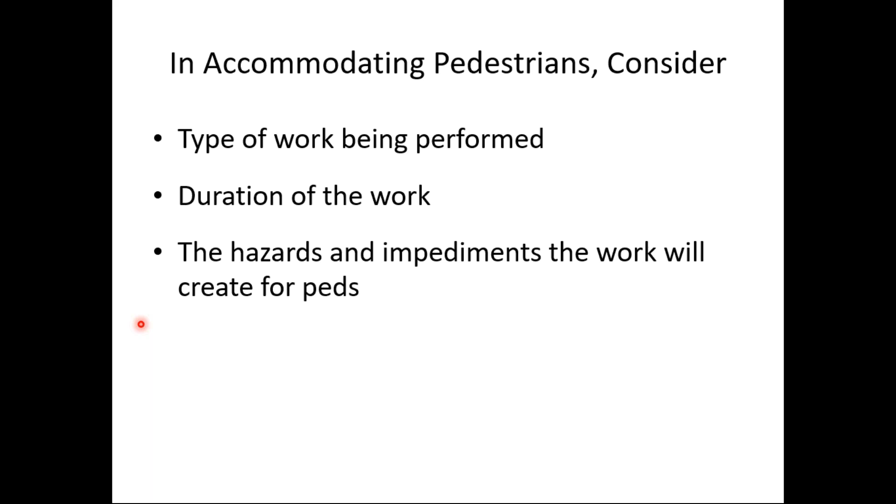So when you're thinking about accommodating pedestrians, think about the type of work being performed, the duration of the work - somebody asked about that earlier, and we'll talk more about that - and then what sort of hazards or impediments the work will create for pedestrians.

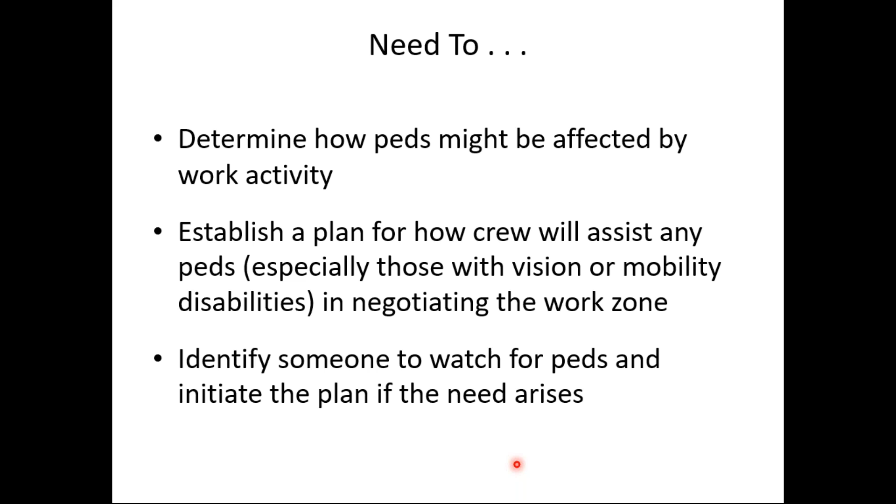But what if the traffic control zone is left in place over several days and we don't have workers present 24/7? Then we need some more extensive effort to accommodate pedestrians. And remember, they need to be accommodated throughout the entire temporary traffic control zone.

So here are some approaches to routing pedestrians. But before I identify those, I want to mention, first and foremost, consideration should be safety for all pedestrians. Safety and accessibility are two different things. Just because something is accessible doesn't mean it's safe. We still need to use our training, experience, and knowledge to make sure the temporary traffic control is safe as well as accessible.

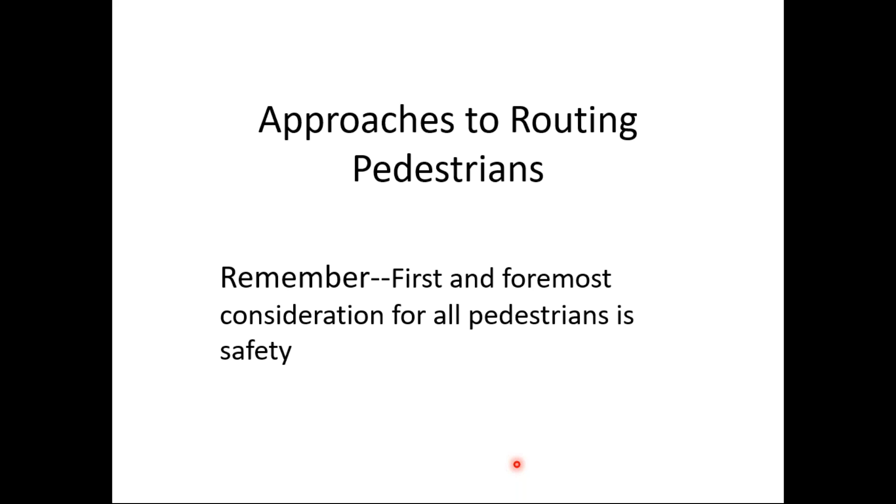These are the three approaches. We should try to maintain the existing pedestrian pathways if the sidewalk can remain open during construction, but we have to realize it can't always remain open. Then can we develop an alternative pathway that's parallel to or easily reached from the current pathway? Maybe shift the path, or could we put the pedestrian traffic into what had been the parking lane in the street?

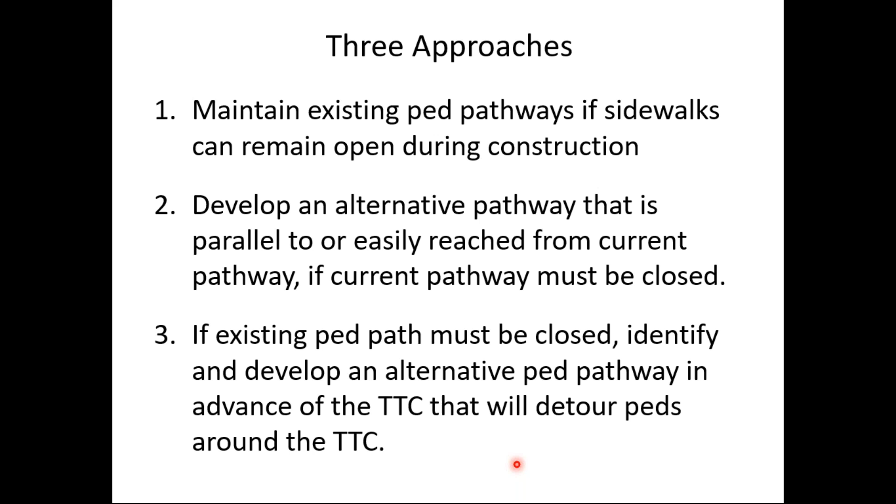Or if that doesn't work, and we have to close the path, can we identify and develop an alternative pathway in advance of the work area where we maybe detour pedestrians to the other side of the street for a block or two and then move them back to the side of the street they were on originally?

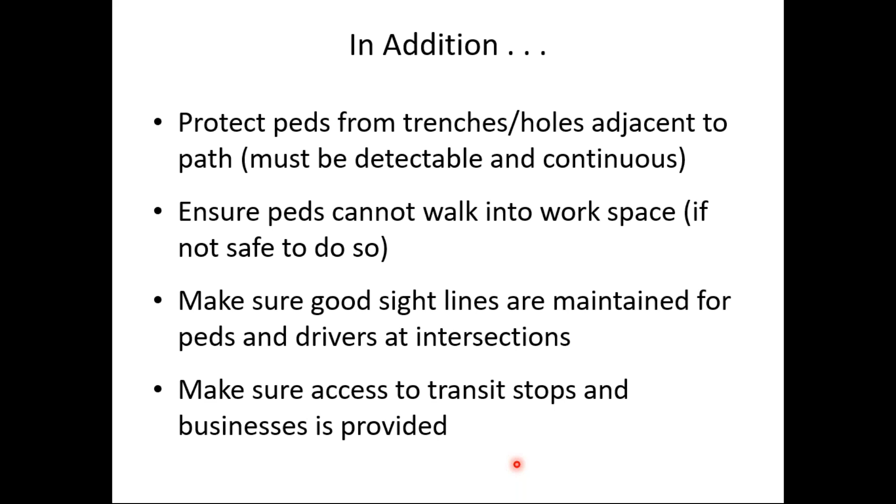All of these paths that we're talking about need to be accessible. And of course, from the safety standpoint, make sure we're protecting pedestrians from any trenches or holes or construction equipment that might be in the area. Make sure that we maintain good sight lines, both for pedestrians and for drivers at intersections. And if you have transit in your area, make sure access to transit stops is provided, and make sure access to businesses is provided as well.

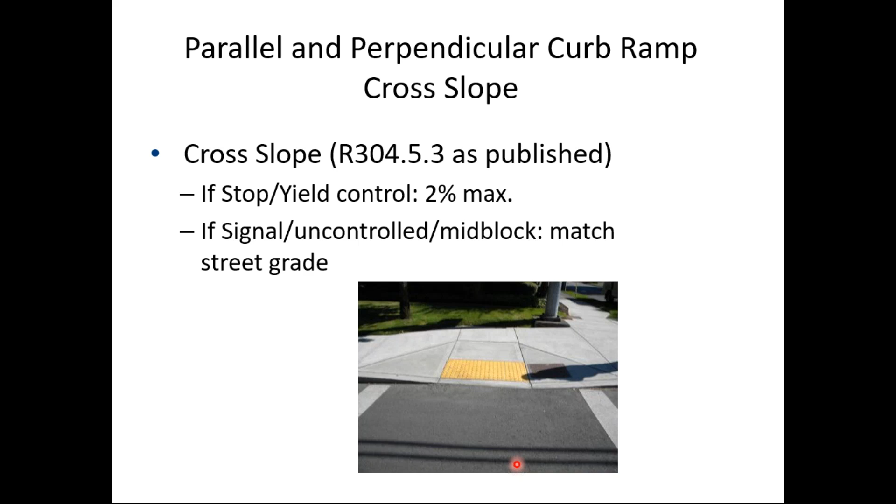All right, thanks Ron. We just had a question from Mitchell, who says the blended transition ramp needs to be 5% or less. Does there need to be a 2% landing anywhere? Good question. Let me, bear with me, I apologize for backing up like this, but there we go. And this is not the best example, I guess.